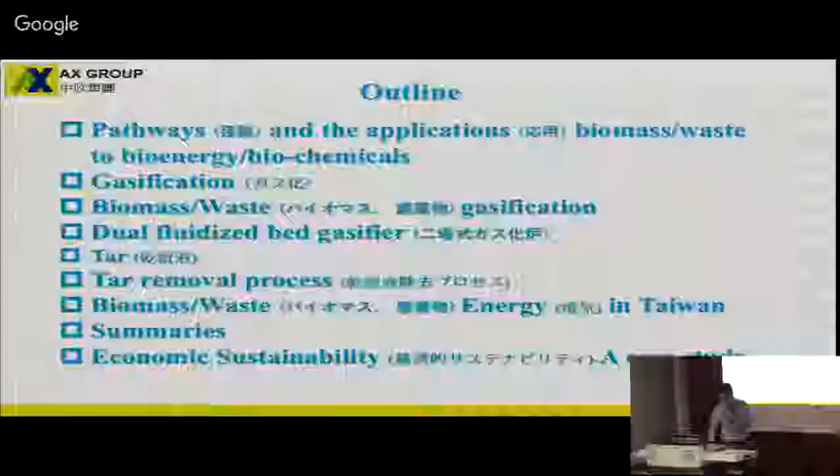Okay, so these are very complicated pathways and applications, because the composition, variety and characteristics of biomass and waste vary very much compared with coal. A lot of people are wrong. I can tell you, I'm facing a lot of high-ranked people who are really wrong, because they think since we can use coal gasification for power generation, why not just use the same equipment for biomass and wastes? They think they are the same thing. Actually, they are completely different, and there are a lot of problems.

So a lot of people developed process pathways to transfer biomass to final chemicals or gas, or fuels, for example alkanes and alcohols. Alcohols can actually replace gasoline. In Taiwan you have 95 or 92 gasoline, and they already use 5% alcohol in Taiwan for demonstration.

And BTX means benzene, toluene, and xylene; they are part of the chemicals. They are not friendly, but we need them a lot, every day, for buses, anything powered by gasoline or diesel. Because gasoline and diesel are very complicated formulas, you put in a lot of things to increase their anti-knock properties. When you ignite the gasoline, you generate a shock, a pulse, and to control it you need additives.

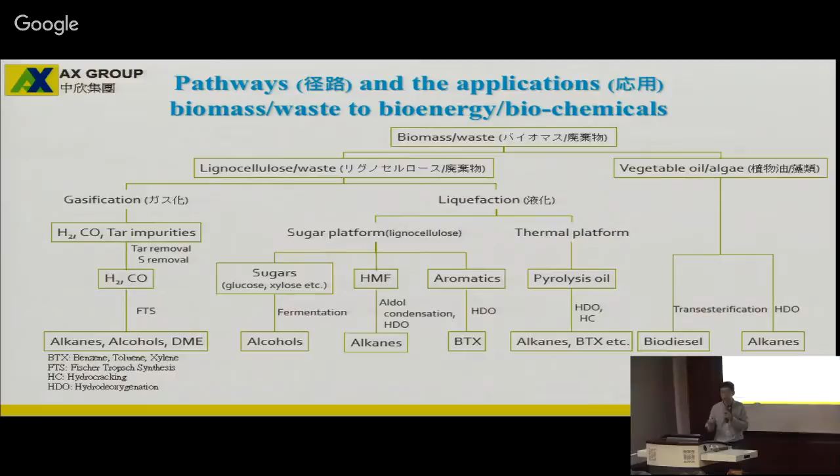So one criterion is: if you have a limited budget and your waste component is mostly plastics, especially plastics, then you go to liquefaction. For the other things, you should go to gasification. And I will tell you why gasification will be the better choice in this condition. Okay.

So the advantage of gasification compared with incineration. Incineration is basically what the incinerators do now. They take all the wastes from the people, the families, take those garbages to the incinerator and burn them. They have some power generation, but the power generation efficiency is around 14 to 17.

It's a more efficient conversion of the biomass into clean combustible gas, which means if you use gasification, you can generate some gas that can be used as a natural gas substitute. We call it SNG, substitute natural gas. That's one way. So you can gasify to generate methane; it all depends on your gasification process, because with gasification you can focus on your target chemical.

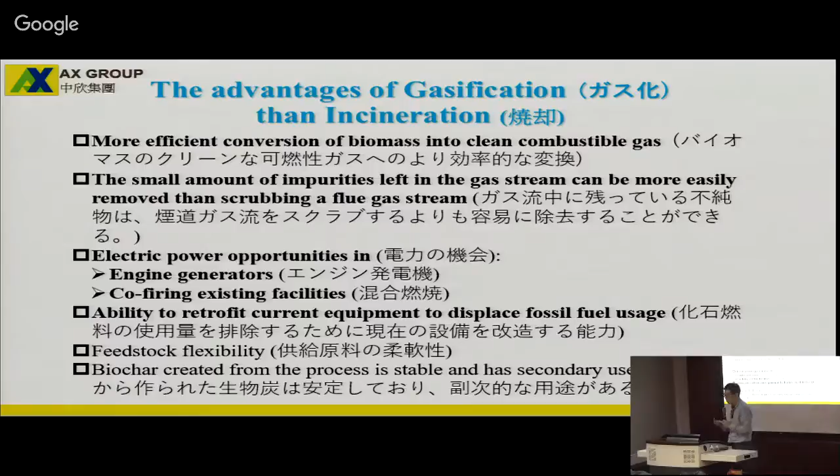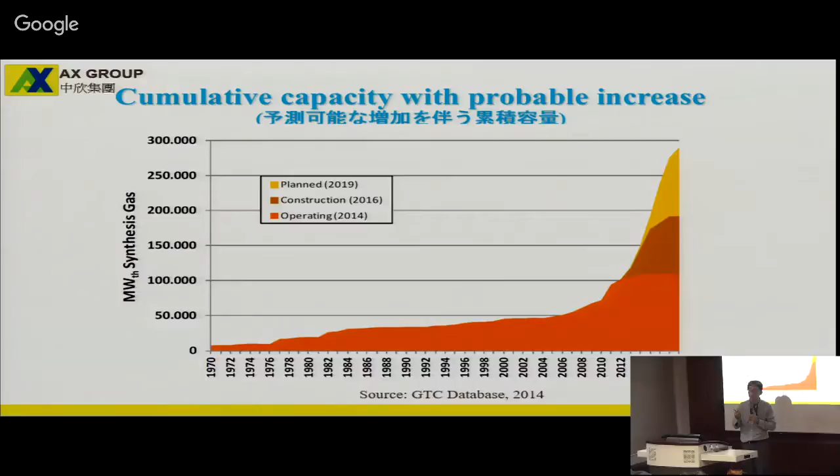You heat it up in the drying, so we remove the water, and you have pyrolysis. Actually, if you stop the pyrolysis, you get a liquefied product. And if you don't stop at this time and keep heating up the temperature, you get oxidation. Oxidation will generate the power and the heat. The heat will self-provide the energy to do the gasification. And finally, you have the gasification.

The final products: you have carbon monoxide, carbon dioxide, hydrogen gas, methane, and ethane, the two-carbon components, and you have tar and chars. So the gasification has byproducts, those two main ones. Char is easy, but the tar is one pain, a headache. Okay.

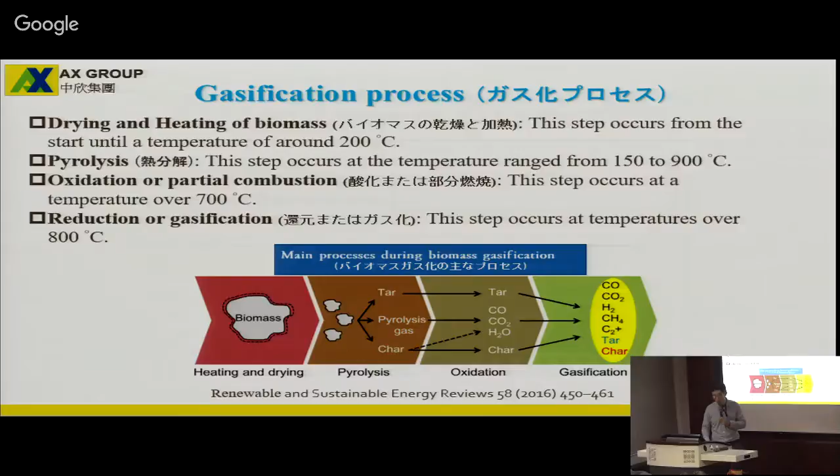You don't know which one is the main reaction. You don't know which one will be the main product, and it's very hard to control it. Why? Because even if you control the temperature, the feedstock is still the main controller. Different feedstocks have different VOC components.

Do you know what VOC is? Volatile organic compounds. For example, organic things that you can smell. If you go to some industrial area, you smell something and you can feel it's not natural, and we call it VOC. It's a more easily vaporized organic component.

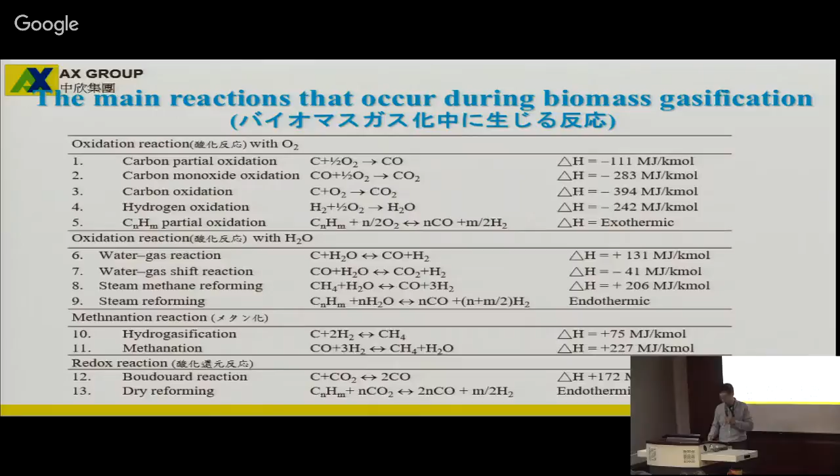Okay. So there are some parameters and indexes I hope you know. If you tell other people, oh, I took a class and they talked about gasification, then they will ask you, what's this gasification? So gasification is basically based on these indexes.

The first thing is biomass characterization. You have carbon, hydrogen, oxygen, nitrogen, and sulfur, and they have energies. So basically, when you do the characterization, you will do the elemental analysis, so you will know the ratio of those elements. And there's also ash and fixed carbon.

Volatile matter is compared with fixed carbon. Fixed carbon is very, very hard to combust. You have to burn it at a very high temperature for a longer time. But the VOC, the volatile materials, are easier, with a shorter reaction time. And the heating value depends.

I use HHV here. So next time you see HHV, it represents the higher heating value, and there's also a lower heating value. Low and high all depend on whether you include the water phase transformation energy or not. Because water going from the liquid phase to the gas phase has a phase transformation energy.

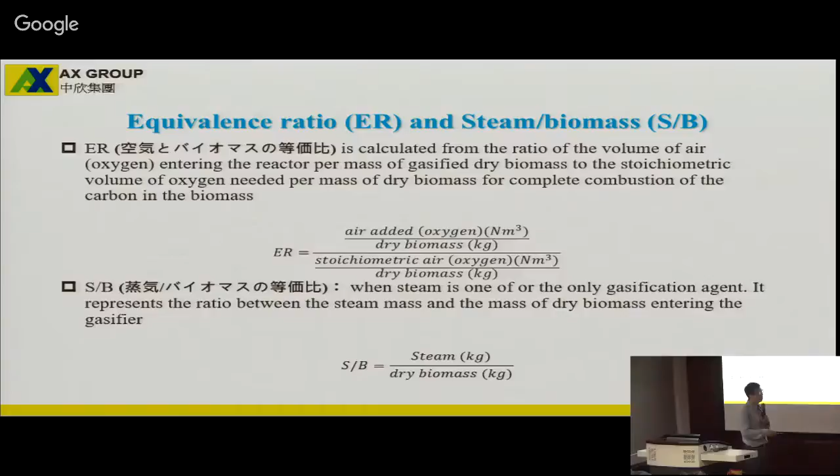Okay, so this is basically how you calculate the ER and the SB ratio. The ER ratio is basically how much oxygen you need to completely burn the biomass, and you divide by the total biomass. And for the SB, it's how much biomass you need to burn. We call it burn, but actually it's not burning. It's gasification, the steam and the dry biomass ratio.

Okay, we talked about a lot. I told you the gasification process, the full process, the equations. So what is gasification? This is gasification. This is how simple it is. So you have a stove. You put something organic in. You have the carbon, you have hydrogen, you have carbohydrate things and put them in here.

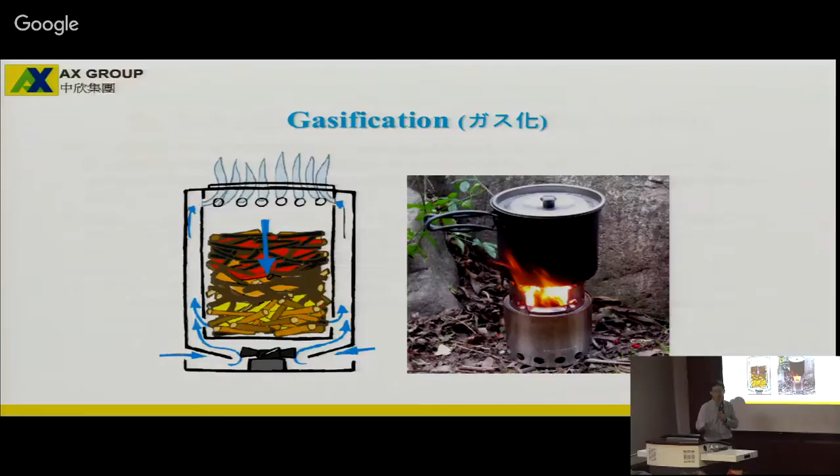And you put heat here, and slowly the carbohydrate will go down because they transfer from the solid to the gas, and the gas goes up, and it slowly goes down with the feedstock. So this is gasification. It's simple, right? It's not difficult, but actually no. This is just the idea, telling you what gasification is, but the whole process, like I told you, is so difficult.

Okay. I showed you in the beginning there's an industry already. A lot of people use gasification for industrial applications, and actually Chevron, Texaco, and GE, have you guys ever heard of those companies? Big companies, right? They do gasification too, but they use fossil fuels. And why do they use fossil fuels? Because that kind is called the entrained bed gasifier.

Entrained bed gasifier means that mostly you liquefy it. You powderize your coal, and you put some water in there, so you make a slurry. You make a slurry and use a pump to pump it into the reactor, like spraying. And you spray into the reactor and you burn it completely. So that's an entrained bed. And entrained bed has many advantages. They are very good, very high efficiency. That's one thing, very high efficiency.

Second thing, they can do high pressure reaction. So why can they do high pressure reaction? Why is this so important? Because the Fischer-Tropsch reaction is a high pressure reaction. So if you have something pressurized in the beginning, you can do either the power generation or the chemical synthesis. And coal is cheap, so why not? And the efficiency is good. So they industrialized. But the limit here is they only use coal. Biomass cannot fit in this kind of system, even though it is gasification.

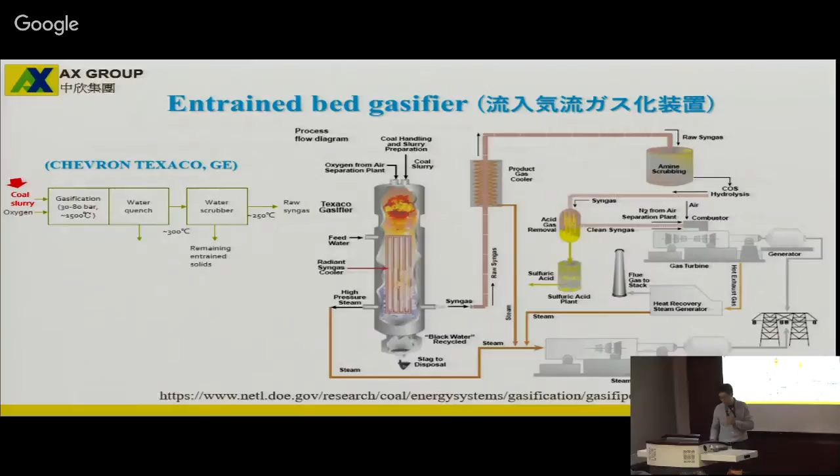Okay, so they use these to industrialize, and this is the main industrial gasification application now in the world. Okay, so you have syngas. This is the final product from gasification, and you can see the branches here.

You can go to any chemicals to replace fossil fuel. Acetic acid, wax, acrylonitrile, acrylic acid - this is for plastics. So you can make everything green.

You recycle the waste, you recycle the biomass, and turn it into syngas. By this process, you can have those things to replace the green things. But the problem is they are too expensive. The process is too expensive.

So if you can develop something easy, straightforward, and recyclable - because if you recycle things, people pay you money. They are wastes. If I have garbage, I have to pay money to the Taipei City. Actually, I throw the garbage, I have to pay them to recycle my garbage. I think you have to buy the special bag.

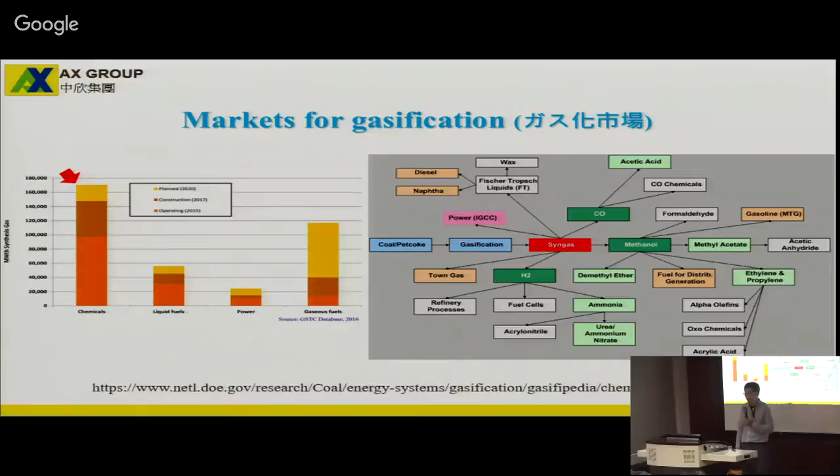Okay, so the feedstock ratio here, you can see it's majorly still coal. Like I say, Texaco, Chevron, GE - the entrained bed - they use coal as a feedstock. The mainstream, of course, coal has high dense heating value, high density energy, so it's easier to use and it's cheap compared with biomass, because with biomass you have to harvest it and buy it from other people, and they cannot come steadily, so it's not easy to control.

So of course coal is the highest one here, and biomass and waste is almost nothing. This is one thing we have to improve for the bigger picture - that's what the big guys always say for good things. We need to increase biomass and waste usage in gasification or other applications.

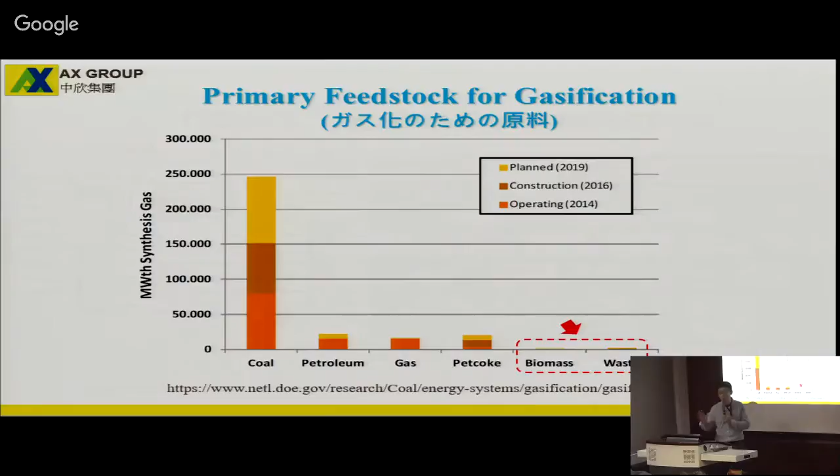Okay, so I'm going to introduce - I think I have 10 or 15 minutes left before the break - so I will go to biomass and waste gasification very quickly.

So from the entrained bed gasification, there's - I should say - two major design gasifiers here. A and B are fixed bed, and C and D are fluidized bed. So there are two major categories.

And how you choose is very complicated - which kind of design you use for your feedstock is very complicated. If you have woody things, big chunk things, you go to the fixed bed. And if you have irregular things and very complicated composition, you go to the fluidized bed. That's one index for choosing how you pick the gasifier design.

And the other thing is also the capacity. The fuel capacity - you can hear from downdraft, updraft, and bubbling fluidized bed, which we call BFB, and circulating fluidized bed, which we call CFB, and pressurized fluidized bed, which is fluidized bed but pressurized. So you can see the scale for the fixed bed, you can only go to the small scale.

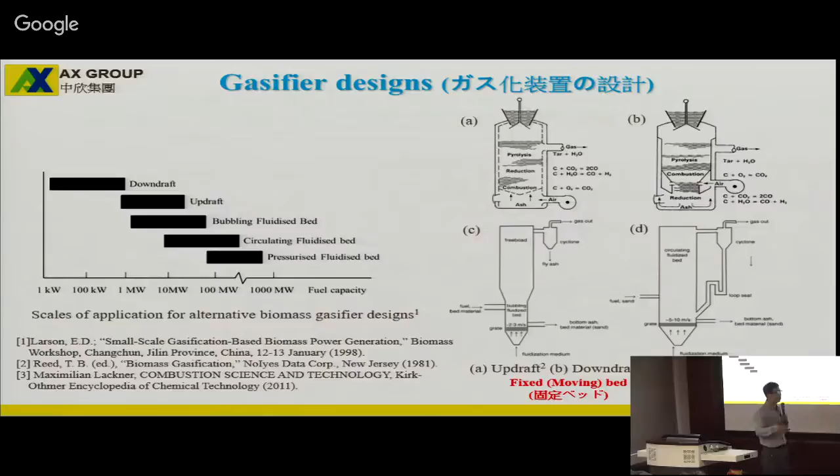So this is the design. And if you go to large scale - which means a large scale in one reactor - you go to the fluidized bed design. So this is the fixed gasifier design, it's the same process I just presented in the previous slide.

Drying, pyrolysis, partial oxidation, and reduction produce the ashes. Downdraft means the air is going the same way as the feedstock. Updraft means the air is going one way but the feedstock is going down, so it's counter or encounter ways versus the same direction.

Okay, so I'm going to do probably just five minutes, if I just tell you about the dual fluidized bed gasifier.

So we have fixed type gasifiers and fluidized gasifiers, and they've already been used for about 100 years. In the past 20 or 25 years, people started to design what they call the dual fluidized bed gasifier, which combines the BFB and CFB and separates the process, because previously it was very difficult to control the process.

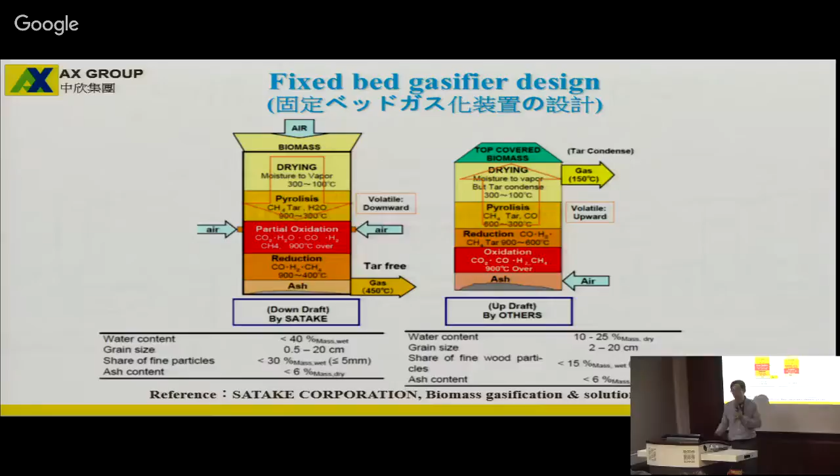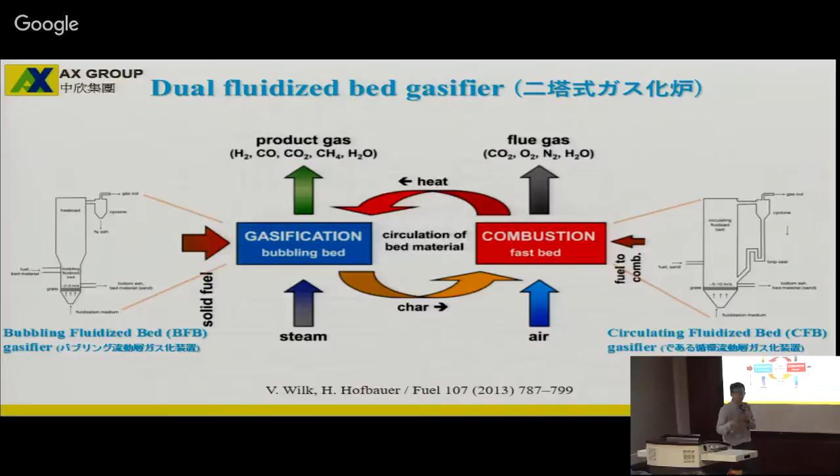You cannot control it. In most fluidized beds too, but for dual fluidized bed, they separate into the BFB and the CFB. In the BFB they do the gasification, and in the CFB they do the combustion. So they separate the process, the reactions are separate, and the reaction temperatures are separate too. The gasification is controlled around 700, and the combustion is controlled around 900 to 1,000. In this way you can do better control for the efficiency.

Direct is just like, normally I indicate the fluidized bed, and fluidized bed has BFB and CFB, which basically depends on the air circulation. It's very complicated—you have to design the bed, design the air flow rate, use different sizes of sand, and control the circulation rate. For the BFB, you have to control the mixing of the bed, the sand, make it bubbling, and have a properly sized freeboard. So it's very complicated, so we call it direct.

And for the dual fluidized bed, we call it indirect gasification, because you separate the combustion and gasification. What is the advantage of indirect?

For example, there's nitrogen-free gas without an ASU. If you want to use oxygen to do the gasification in direct, you need an air separation unit, and it's expensive. In indirect, you don't need to use that—you just use steam that can do it.